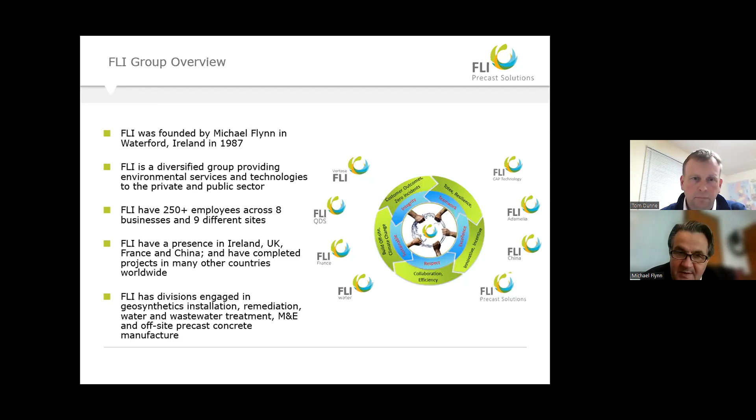The Precast Solutions Company has been part of the group since 2018, and most of the product there is exported, although we have recently built up quite a substantial opportunity and market in Ireland as well, and Tom will talk through that.

So FLI dates from '87, which is a long time ago. Lots of things have happened in the world since then, and we've grown and adapted and diversified and changed as time has gone on. We're very proud of the FLI Precast Solutions Company and the team. We have a very diverse engineering team there. I'll hand over to Tom now as the MD to take it away.

Thanks, Michael. So I suppose the ethos here and the driver behind Precast Solutions and the solution is...

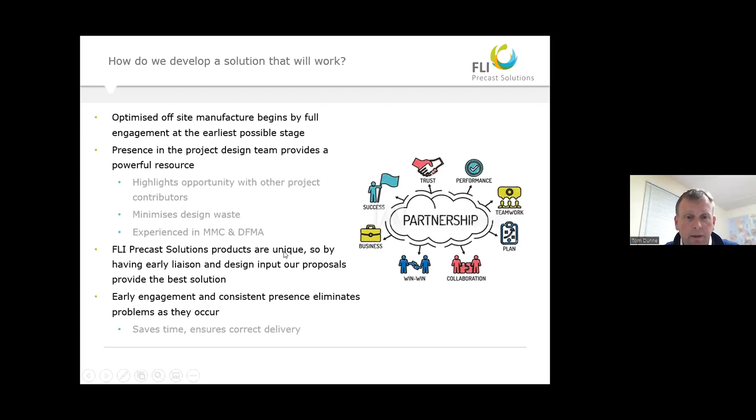The technology we use here is large offsite fabrication. Basically, and we'll see it in a couple of slides coming up shortly, we have large precast units which have projecting rebar out of them to lap over on site. We stitch them, as is the terminology we use here. We stitch all of these precast units back together to form, with large reservoirs in particular, or circular structures, so that you are getting your continuous monolithic structure on site.

The unique design and manufacturing process that we have here allows installation up to 90% faster than traditional methods on site. So for example, as we'll see a couple of slides later, with big circular FSTs and PSTs, you're down to 3 operatives on site, a crane driver plus 2 operatives, putting in a 35-40 diameter FST, the precast element of it, in about 3 days. You don't have any complex scaffolding, you don't have any complex steel fixing on site, but at the end of the process, you do have a monolithic concrete structure with which you're going to get your 120 year design life as specified in the works information or the client specification.

We have 3 software packages: we use Robot for the finite element analysis. We then detail in Tekla and/or CADS RC, and Revit if the client requires. So we would take in the models from particular clients, whether it's the holding down bolts, etc., from superstructures, or whether it's all the M&E pipework, etc., and we bring them into our model.

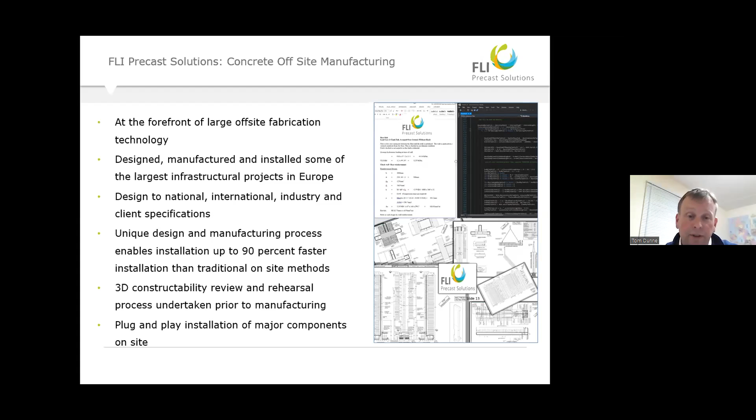Just a flavor of some of the structures we do. What you can see on the screen here now is a lot of our data center work. We probably have 4 main areas of our 4 main clients here at the moment. We have the data center sector, the water and wastewater, the housing, and airports.

So as we can see on the screen, there's a lot of products for the data center sector at the moment, where, as Christy and Michael said, we export right across Europe at the moment, with a couple of key data center providers. We also carry out the mechanical and electrical fit out here on site and tested in Carlow, so that when units arrive on site, we're again eliminating as much as possible the confined space issues, which are a growing concern on site. So we're negating that risk.

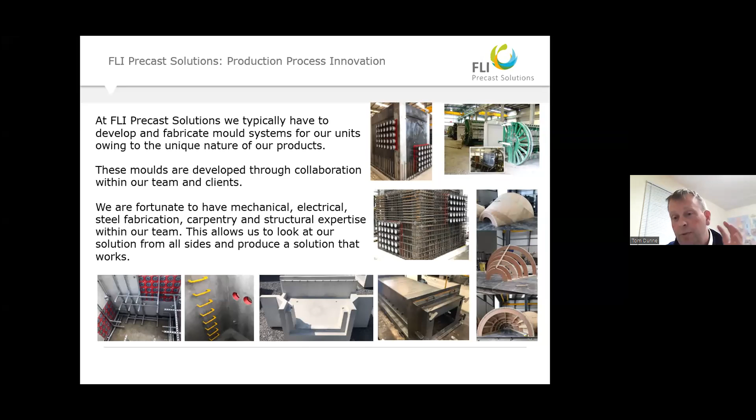And that has been driven by, as we said a while ago, that ECI, or early contractor involvement with our client in particular here, who wanted to take as much as possible offsite. So you can see in the bottom left-hand corner of the screen there, where you will have the unistruts, cable trays, earthing bosses, all will be fitted here in the factory. All those units will be hydrostatically tested as well. So when they arrive on site, they are fit for purpose, and there's no further sealing, etc. required. That was the data center we done.

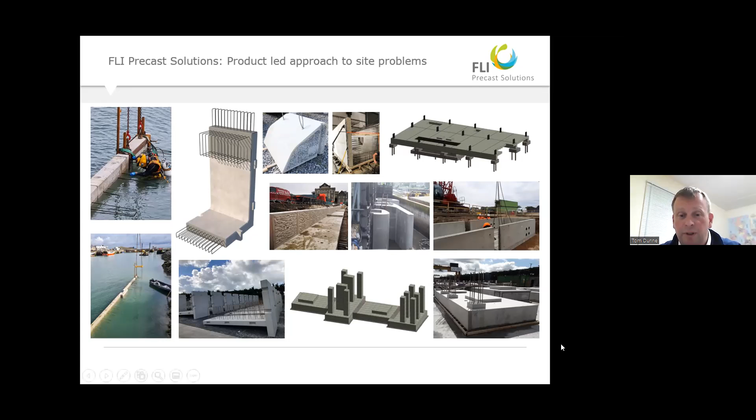Again, we're back to the data center sectors again. Penetrations, as we touched on a moment ago, I think there's 120 penetrations in some of these chambers, all hydrostatically tested, ladder rungs, pulling irons, etc. that go into the units. It's a fully in situ solution that we just manufactured offsite. And in addition to that, it had to be manufactured in such a way that these could be shipped to all of the data centers around Europe in this particular case. We're currently looking at 2 data centers at the moment for them in Australia, where we actually have shipped water retaining structures to before.

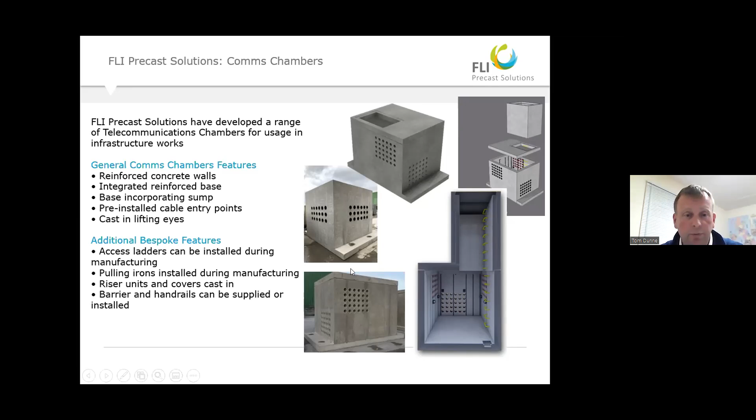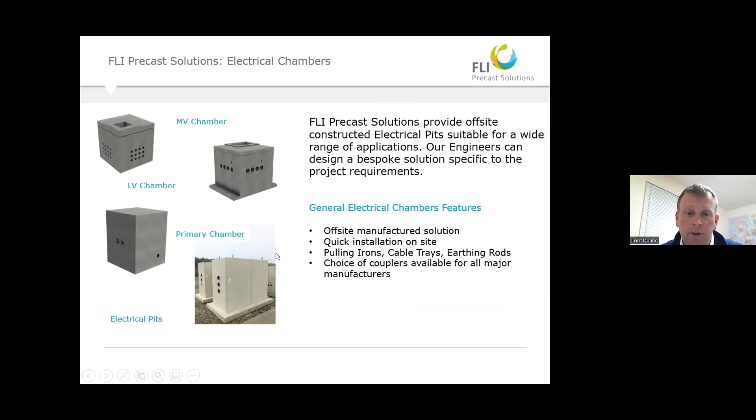An array of products that we currently have there at the moment. So MV chambers, LVs, primaries, secondaries, electrical pits. Again, speeds up the operation on site. For example, in Dublin Airport, we had 2,500 electrical pits to drop in the ground. They had to be manufactured to a 3 mil tolerance height-wise, so that the paving machine could pass over them. So like any issue or problem on site, if we know about it early enough, we can certainly come up with a solution to manufacture something within the tolerances that the project or the client requires. That's the bottom picture there, which shows the precast electrical chambers going to site with the manhole lids cast in.

Just some other unique bespoke products on the bottom right hand corner, and we do an awful lot of trench work for ESB, data centers, etc. And we supply them with protection bars if there are comms cables, etc. in them, and also with lids from Fibrelite or some of these manufacturers.

We take that scope on board, and we'll supply them with McGard bolts, etc., where there's security concerns on site to keep the trench cover actually secured in place. So we deal with McGard in the US on those particular connections.

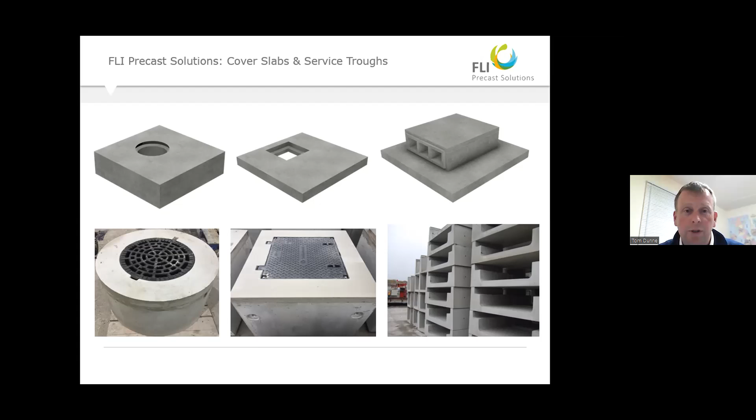The key driver here, especially on circular tanks, is the reduced man hours. The complexity is completely taken out of it from a site perspective. There's very simple formwork which can be done off a MEWP both inside and outside, and you have all repetitive shuttering work, but you only have a 500 millimeter stitch all the way around your tank, and it speeds up your operation.

This was a product we developed for the DAA in particular, where it was a security barrier. Again, they came looking for barriers to temporarily fence off the site to split landside from airside. There was and is obviously a specific safety regulation as regards international airports, and it was developed. You can't really see it on that screen, but there's rebates built into the unit so that the fence cannot be pulled out at the bottom.

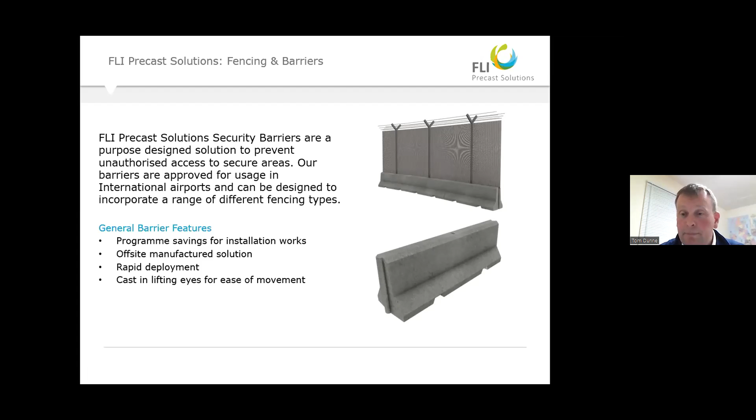The fence, if you look at the bottom screen, there are holes left in it, so the fence posts drop down at whatever centers the fence supplier wants them, and they can be removed. The ends of it are splayed slightly. It's hard to see it there, so that they can snake around bends. We give them 90 degree, 45 degree units. Again, it's just to speed up and be flexible with a simple thing like fencing off the site, that this can be put up, taken down, and still give that level of security.

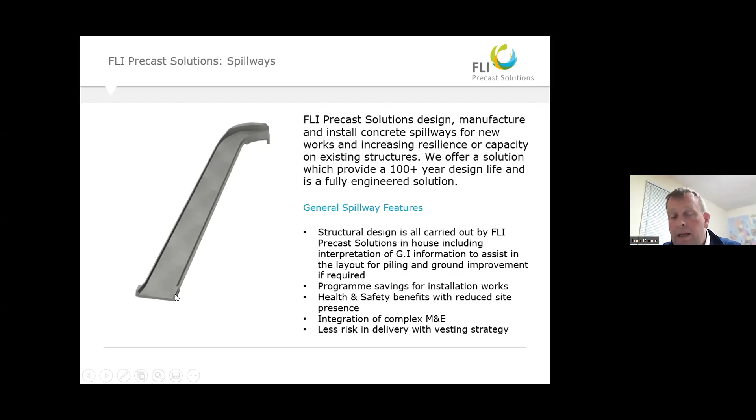A lot of bespoke structures we'll do here as well. So a lot of spillways, etc., predominantly in the UK, coming from natural reservoirs, 100-year design life. Very, very bespoke. Obviously, you have tapering units going the whole way from 2 to 3 meters at the top, maybe down to only 300, 400, 500 millimeters at the base.

The installation sequence will be, once the excavation is opened up, we'll simply pour like a 75mm footpath, about 1.1 or 1.2 meters wide, where we land the units on them. This just gives us something to line, level and plumb the unit. We'll then tie the floor, big in situ floor like normal. You can drop in a MEWP, run around with, as we said, repetitive shuttering on the inside, and stitch your whole tank together. So you have a very, very fast, simple process on site.

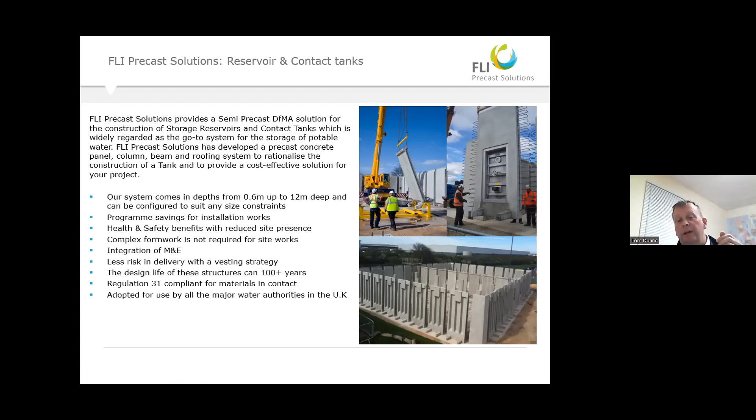Bewdley Bank service reservoir in the UK. The reservoir included integrated valve houses, sumps and dosing chambers. Mott MacDonald Bentley were our delivery partner on this, and their numbers showed a 70% reduction in working at height, predominantly driven by the speed at which they can put it up. There was also a 35% reduction in deliveries to site, because you're sending a lot less deliveries with bigger loads - sending 28, 30-ton trucks into site, as opposed to multiple load trucks with rebar, concrete, etc.

The image in the bottom right-hand corner shows the rebar overlapped. On site, you have to tie 3 or 4 vertical bars which have bobs tied into the base steel, and then the units come to site with an MKK system built into them, so you don't have bolts going through the stitches. They simply clip on to the precast itself, shutter inside, shutter outside, and stitch your units back together.

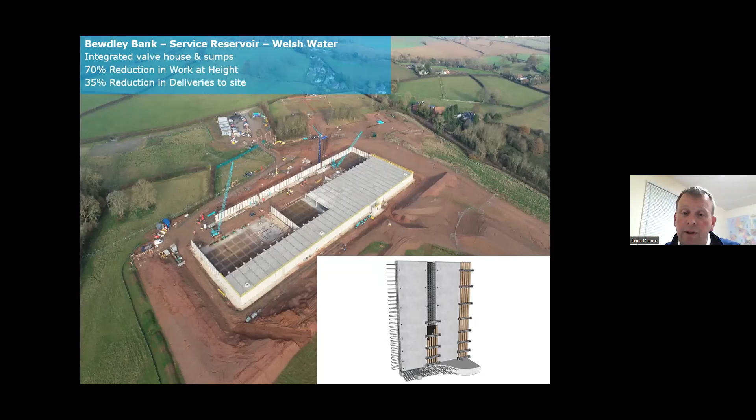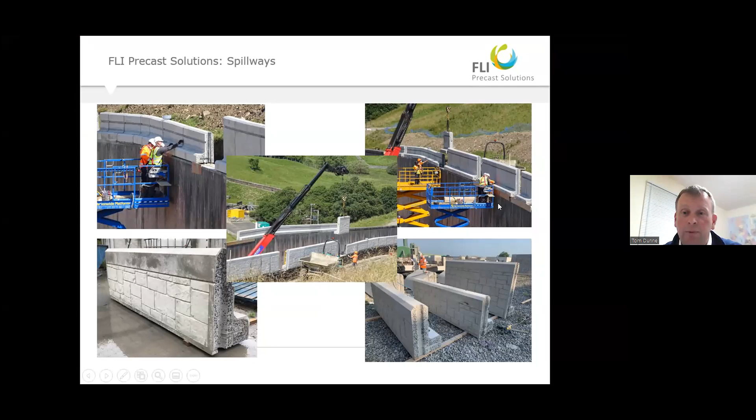This was a job in the north of England. This was the project I mentioned a while ago, where we had to replicate the old Victorian reservoir to increase the height. To be fair to our designers here, in conjunction with the guys at Tilbury Douglas, we had to integrate and design the structure, having surveyed the old reservoir below, to ensure it wasn't compromised by the additional height put into it. So we do have that design capability here within the business.

Another element of the business here are slot drains, ranging in size the whole way from 300 up to 600 diameter, with junction boxes, bends, miters, etc. There are other systems on the market such as Gatic, which have proven to be slower on site. This is very, very fast compared to some of the other options, running from C250 loading up to F900 loading. These images are actually taken from the airport in Dublin, so these are all F900 loaded, or capacity loaded, units.

While we're looking at that picture - in the manufacturing process here, I mentioned at the start that we heat the water. What that allows us to also do is heat the molds as well. We can actually turn precast 3 times a day out of the same mold, which speeds up the turnover period. You're getting a lot better bang for buck out of your operating costs, running costs, lighting and heating in the factory. So there's potentially 3 times the amount of precast coming out of the same floor area than if you didn't introduce those mechanisms to speed up production.

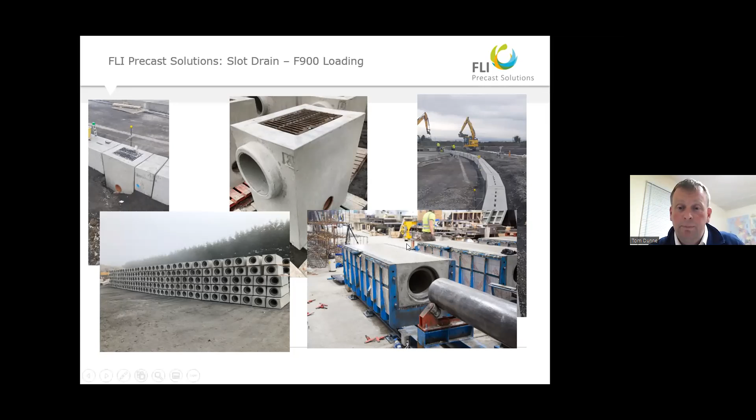Stormcast - very, very big across the UK, and a certain amount here in Ireland as well, predominantly in the housing sector. It's branded as Stormcast across the UK at the moment, and was an award-winning system for many years over there. There are other systems creeping into the market, predominantly plastic. We've over 1,700 installations. This system runs in depths from 0.8 up to 3 meters - 0.8, 1, 1.2, 1.5, 1.6, 2, 2.4, and 3 meter depths. It's predominantly for the house builder for stormwater attenuation.

Again, similar to our infrastructure product - projecting rebar, hydrophilic strip, stitched together, in situ floor, which we would predominantly design as fiber reinforced if the GI and the ground conditions allow. If not, we'll design with an in situ design.

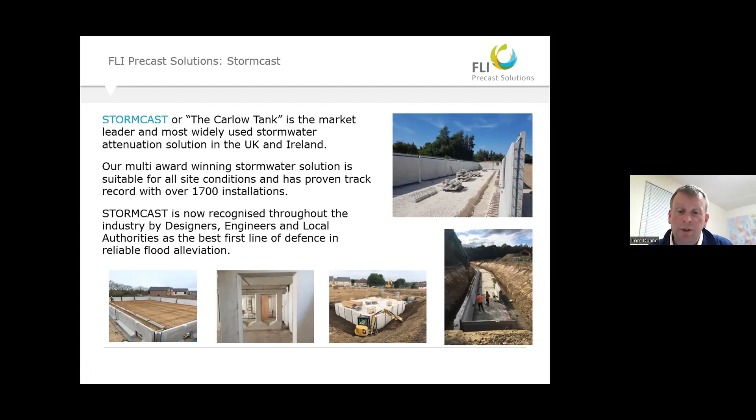Why Stormcast? Predominantly because of its flexibility in plan area, but a lot of it is because utility companies in the UK want to be able to inspect, clean, and maintain their assets. By putting in a system like this, you can get back into your tank at any stage down the line. Plus they can be put in under car parks or roads, depending on loading requirements, and we will design them accordingly. One of the failings with some plastic systems is that they're not as adaptable to higher loading conditions, and some are very difficult to clean and maintain afterward.

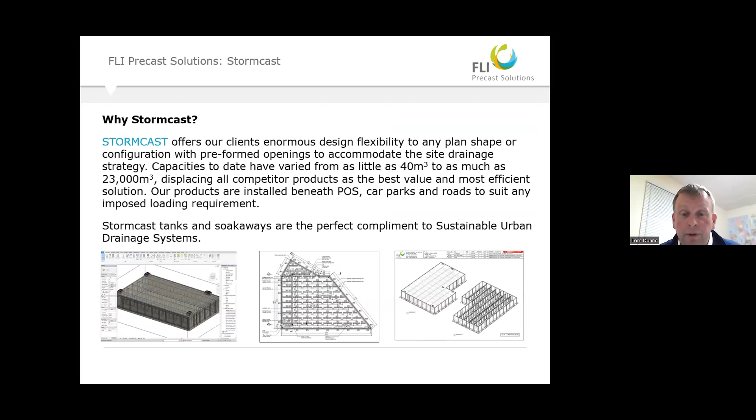Just some of the features of Stormcast: high overburden, heavy vehicle loadings. We obviously design out the anti-flotation, 100-year design life, unlimited size configuration, depths as we said 0.8 up to 4 meters. Short manufacturing and delivery times.

We do run these products and store them on the shelf here, so they're a very fast turnaround. Designed to BS or EU standards. No temporary propping, low flow benching options as required. Integrated sumps and flow controls. Factory fitted hydrophilic, and the design of the joints is to keep the crack width below 0.2, so you're going to get that autogenous self-healing.

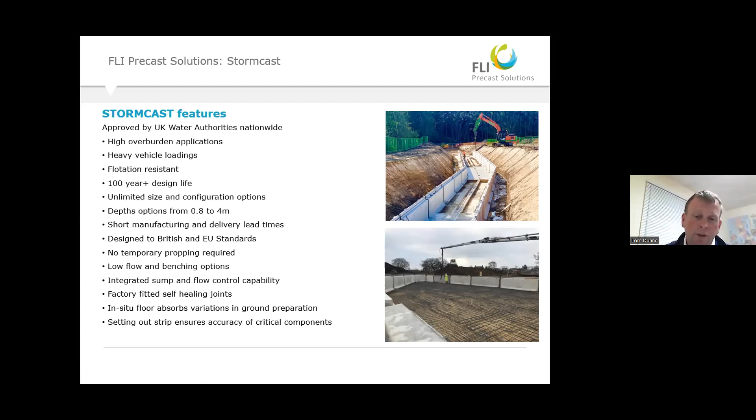In situ floor slabs absorb the variations of ground conditions, and setting out strips, as I said a while ago, ensure the accuracy for plumbing and lining the product.

Back to reduce cost. You can get everything you need into one system. There's no expensive backfill - we're designed to be backfilled with the excavated material. Price certainty, DFMA as we said a while ago, significant use of locally sourced material by the customer, and ability to place under load, minimizing land grab for better utilization of space. So they can go under green areas, under car parks, etc.

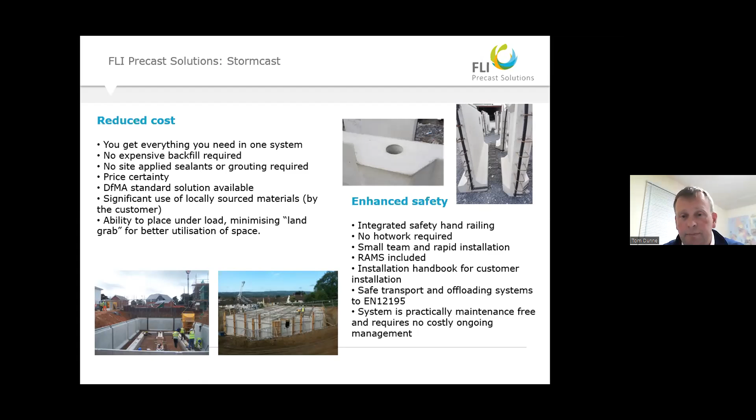The housing products that we do at the moment - there was an area in the market. Obviously there's a big housing problem in this country and probably the UK at the moment as well. There's a shortage of labour on site. The poor block layer gets a bad rap every single time over this. So we looked at the options in the market to eliminate as much as possible the labour on site. No disrespect to any block layers that are relations that might be on the call, but with a focus on eliminating that trade as well, and primarily to eliminate the amount of wet trades on site.

So we're currently on a project up in Kildare, where the developer has asked us - they want to get a house weather tight in 5 working days. So we'll stand our wall units. Their roofing contractor, in conjunction with our guys, have the roofs pre-made on the ground. We'll drop them up on Wednesday, Thursday, they lat and felt it. Friday, whoever's fitting the windows turns up, fits the windows in the unit. So come the following Monday morning, the unit is watertight and ready to hand over to their M&E, their internal guys, to start fitting out.

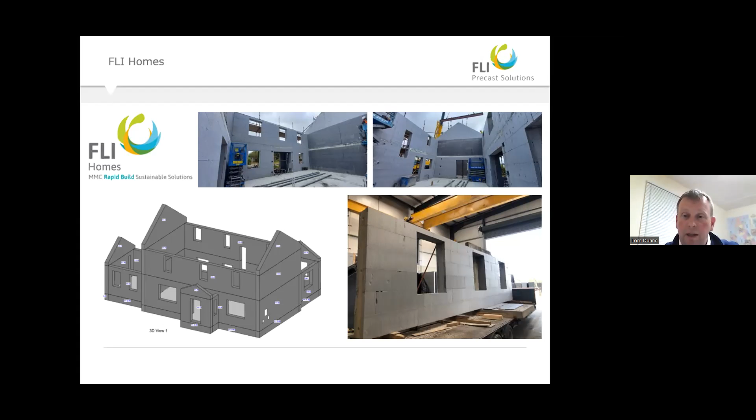There's probably a small video on the next one, which just shows the units actually being dropped in. So as you can see, the scaffolding is up around the unit as normal, and the units are dropped on, bedded in, temporarily propped.

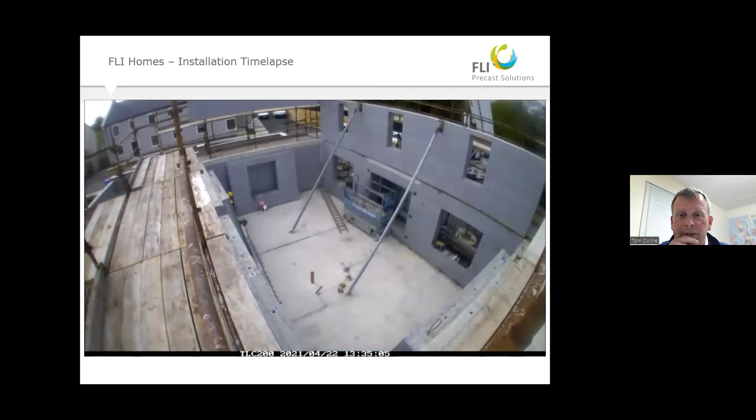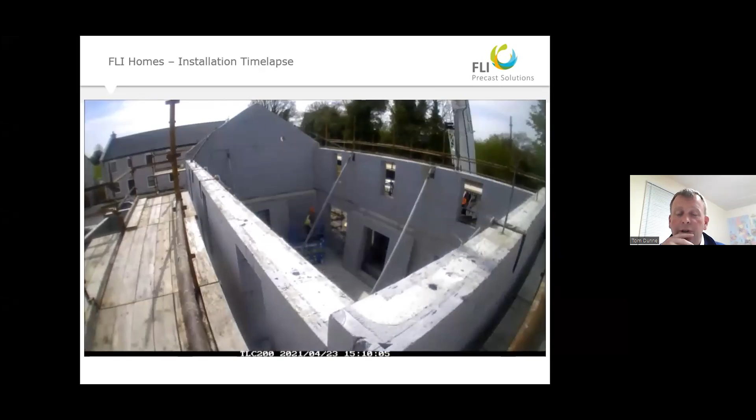We've designed out the connections here in the factory as well, so there's continuity on the installation both inside and outside. And then there is a structural grout that goes down, which does two things: it gives you continuity on your concrete, but it also locks all of the bolts together.